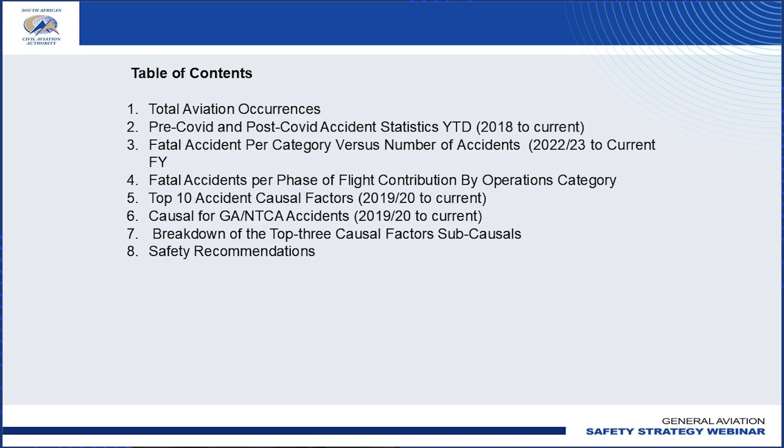For the current year, we've just looked at the first quarter, which is April to June. We've recorded thus far 33 accidents, 9 serious incidents, 33 airprox events, and 29 CARS events. That gives us a total of about 104 accident occurrences recorded.

Based on the current flying hours and just the estimate that we have there, we do see that it is a decrease of about 9% per 10,000 flying hours flown.

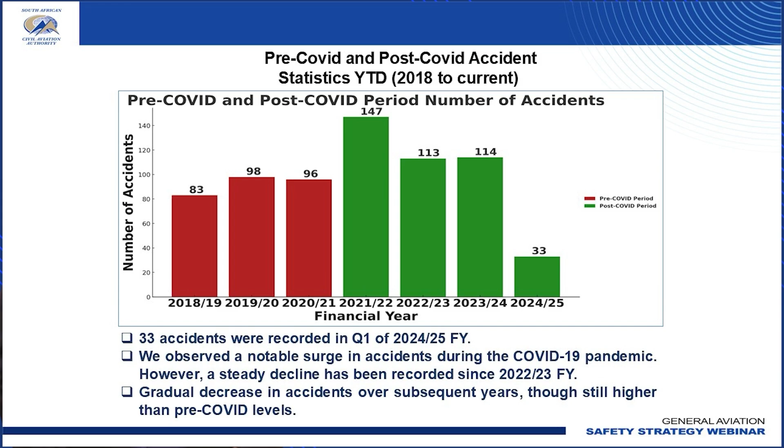In the last few financial years, those accident numbers have come down since the COVID period, but they seem to have stagnated around the 110, 115 number. If you look at where we are currently, just the first quarter number, we're most likely going to get to about the same 110 to 120 accidents recorded for this current financial year.

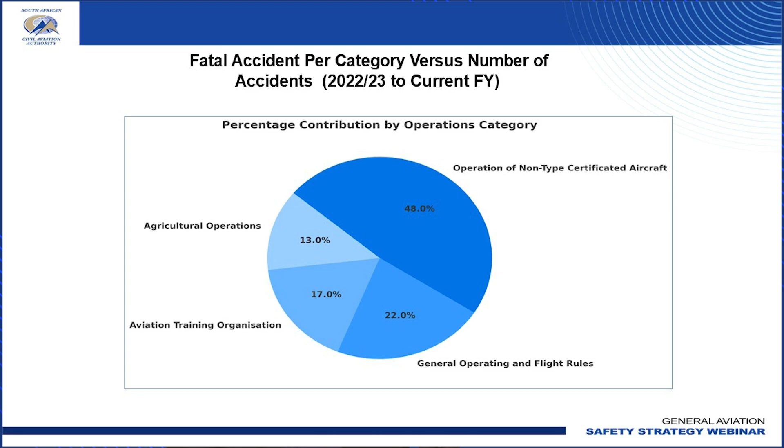Taking the fatal accidents into consideration, what we've done with this slide is break down the fatal accidents per operational category. So 48% of fatalities recorded are in the non-type certified aircraft environment, followed by 22% in the general aviation operating environment, with the balance attributed to training organizations and agricultural operations.

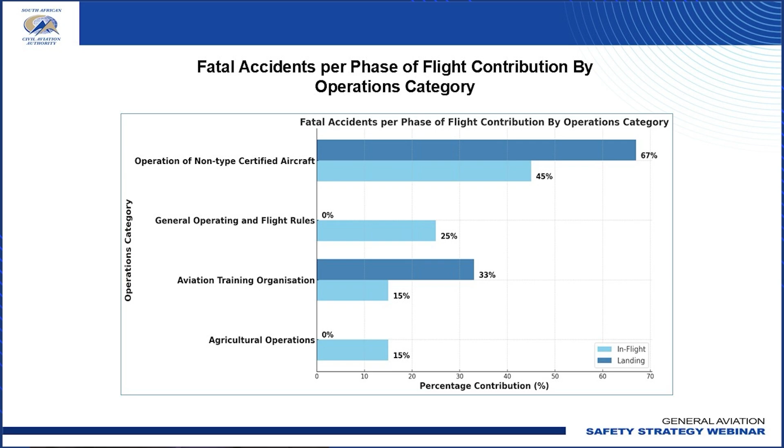When we look at training organizations, we again see a large number of fatal accidents happening in flight and during the landing phases, whereas when we just look at agricultural operations, most of those fatal accidents actually are in flight.

Moving on to what causes these aircraft accidents, we've looked at the top 10 causal factors recorded over the past 4 financial years at AIID. One thing that shines out by sheer number is the pilot and flight crew contribution to the causal factors, followed by mechanical engine and power plant, with the third being collision and structural damage.

What we're going to do is break down these causal factors in the next set of slides. When we look at the causal factors broken down per financial year, what we want is to get a picture of the trend in those top 10 causal factors.

When we look at engine and power plants, we see a decreasing trend, going from the 2021-22 cycle of 29 down to 26 the following year, with 14 of those causal factors in the last financial year attributed to mechanical failures.

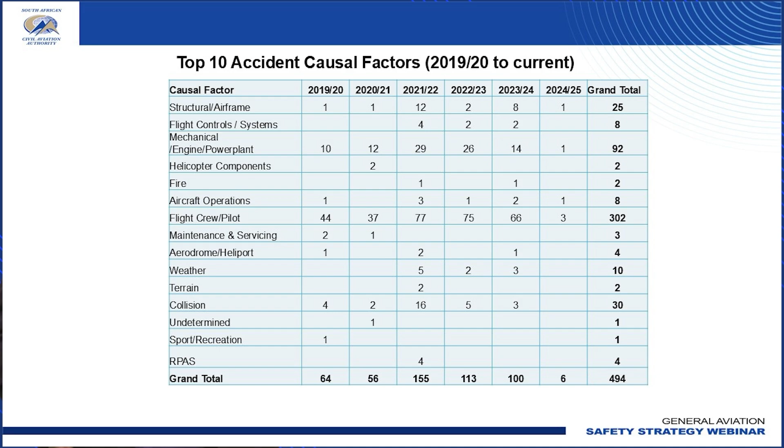So this slide just represents a breakdown of where we see the causal factors. What we will do is unpack this in the following slides.

Unpacking these causal factors, specifically for aircraft operating in the general aviation sphere, over the past 5 years the theme seems to be recurring: the flight crew contribution is still one of the highest throughout the years, most obviously recorded in the 21-22 period, where we've recorded 147 aircraft accidents.

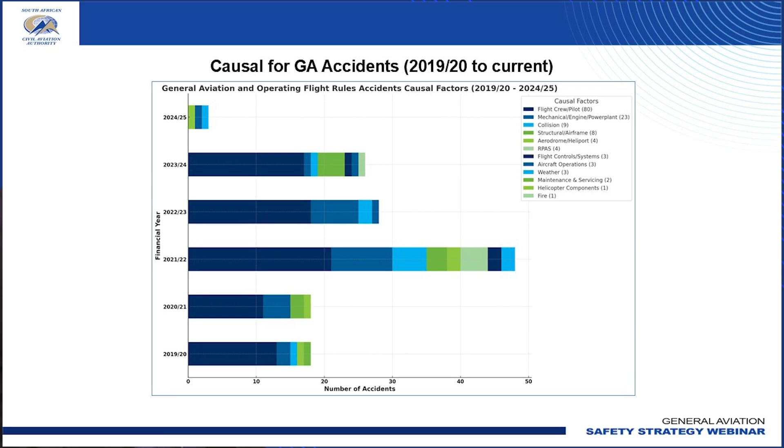So when we talk about the causal factors of flight crew and pilots, what are we talking about? What is it that they contribute in terms of accident causation? You'll see here that 21% is loss of directional control on the ground during takeoff or landing phase, with majority on the landing phase. The other attributions are poor airmanship technique, unstable approaches, and heavy or hard landing.

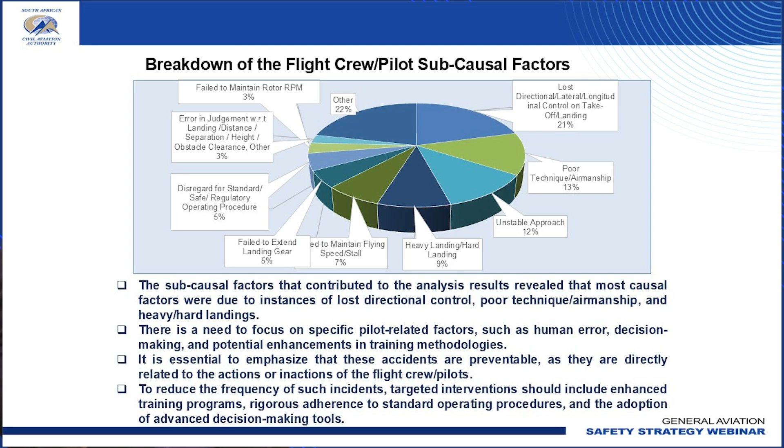So again, when we look at accident causation and take the subgroup of flight crew and pilots, what you see here is that the landing phase of flight is again where most accidents occur, and what leads to these accidents is known as airmanship and aircraft handling.

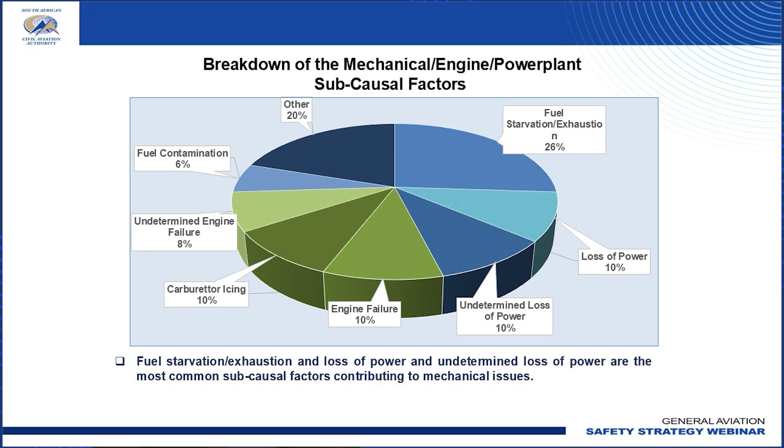Importantly, the takeaway from this slide is that fuel starvation or fuel exhaustion events could be considered avoidable accidents. If managed properly by the flight crew and maintenance crew, these could be totally avoided, which would also lower the number of accidents we see in the general aviation sphere.

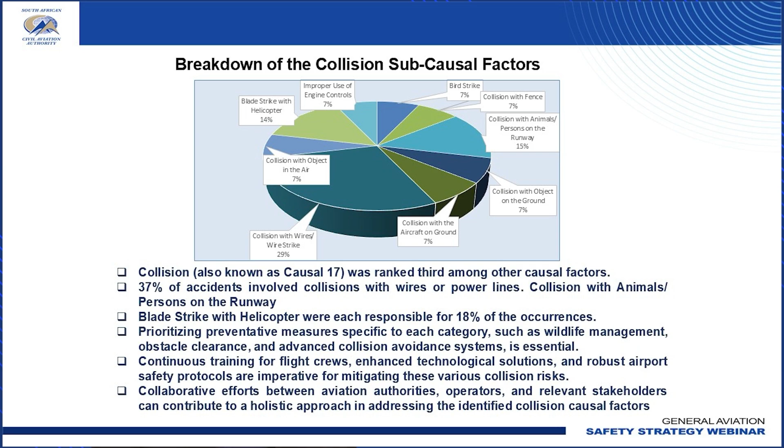This is most likely recorded from the agricultural operations, and this is also due to the nature of the functions performed in terms of agricultural operations. Again, a collaborative effort needs to be made in order to scan and identify these hazards that exist, where we can then lower the number of accidents with regards to collisions.

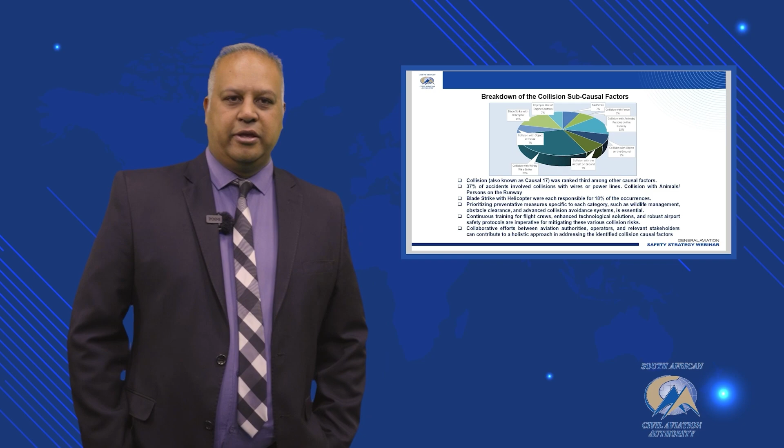We did also record 2 mid-air collisions in the past 3 financial years, and again, these are, I think, avoidable accidents. So what is it we do at AIID that helps reduce these accidents and prevent reoccurrence? Well, the mechanism we use is to make safety recommendations in our final reports and through our investigation process. This is achieved by sending safety recommendations to specific organizations in order for them to implement these recommendations to improve aviation safety.

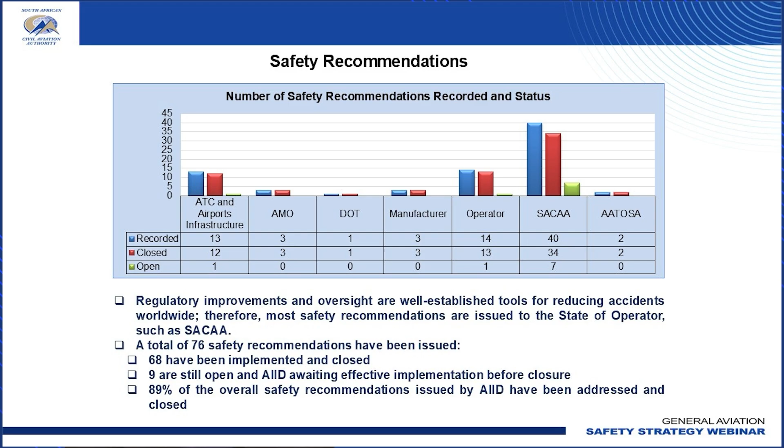What we've seen is that over the last 3 or 4 financial years, we've issued a total of 76 safety recommendations, most of which go to the Civil Aviation Authority, some to the manufacturer, and others to the ATC or ATOs and airports. This is simply because these organizations, being tasked with oversight functions, have the ability to influence the outcomes of accidents in the future.

A key takeaway from this slide is that 89% of the safety recommendations issued by AIID overall are addressed and closed with effective implementation. And that is a good way for us to monitor these accidents. But as said in the previous slides, most of these accidents, I believe, could be avoided and are avoidable accidents, and it comes with just a little bit of practice.

Welcome back, and thank you, Mr. Soomesh Maharaj. So, to all the audience present tonight, you can clearly see the stats speak for themselves. These are real-world stats, stats within South Africa, South African aircraft, and these are stats of fatalities, of injuries, of aircraft damage, and of many incidents.

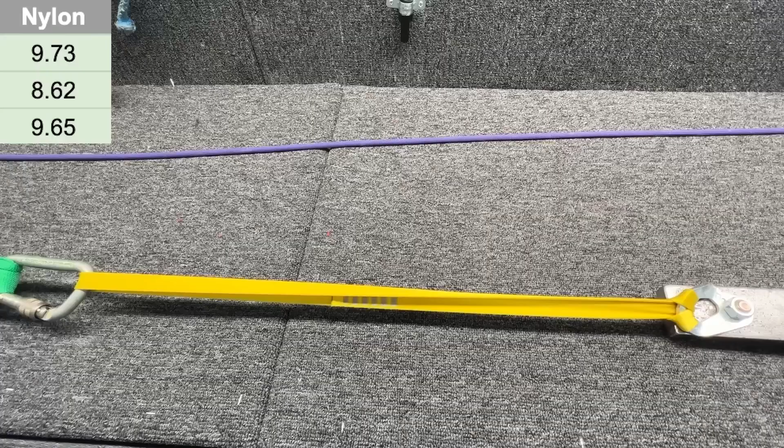No way, it's over 20! We're going to test a lot of girth hitches today, with Dyneema slings, nylon, and on hangers and round stock like a climbing ring or carabiner. We're also going to test girth hitched master points. John Godino from Alpine Savvy says one of the most popular concerns people have about girth hitching is that it dangerously weakens the material to some catastrophic level. He thinks generally it doesn't, since you're starting with something very strong. Let's hit it and see. Starting with slings directly on a hanger... look what it does to the hanger. Consistently not good - you can see damage there, creased. This one's messed up in a few places, comparable damage. Some just popped in one spot, but the numbers were very consistent on the Dyneema and pretty consistent on the nylon too. Next, checking a girth hitch with Dyneema sling on a rounded surface - a totally round bar stock carabiner, not I-beam style, which should give more strength due to less sharp bend radius. 17.62 - there you go, a little deformed there, looks really damaged right where it broke. No way, it's over 20!

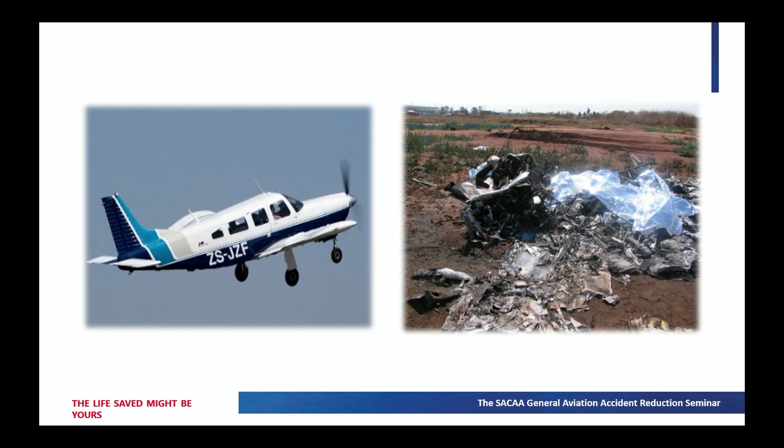This leads to what I'm going to be telling you today - a new perspective maybe on density altitude, high density altitude, and overloading. In a nutshell, these six points are what I'll be discussing with you.

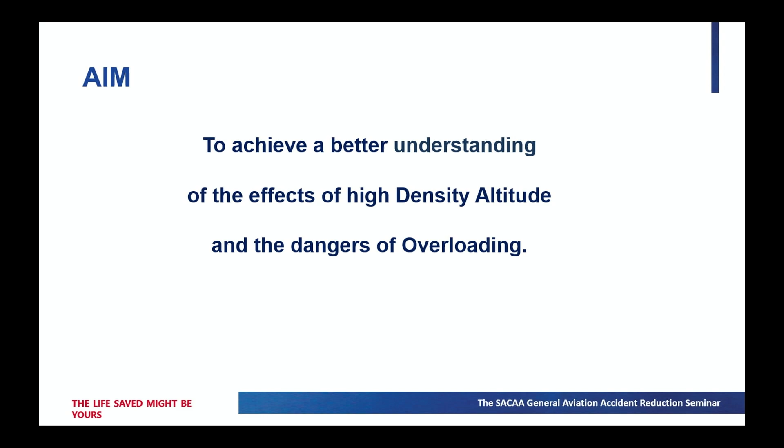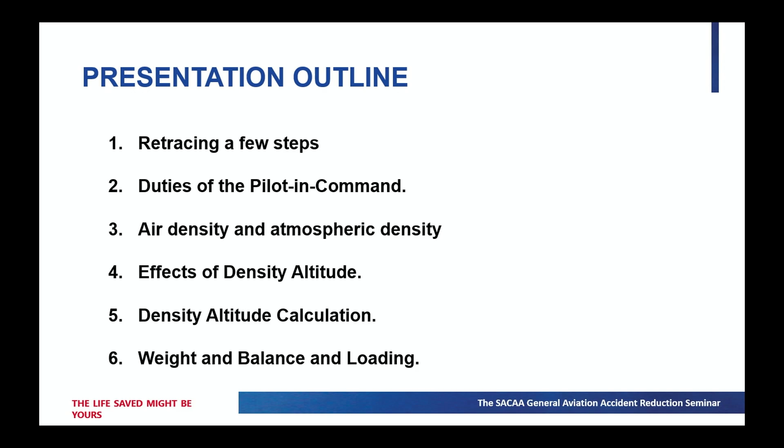There's a 7th one which I'll be closing with. First, we're going to look at a bizarre topic you might not have thought about: what are the duties of the pilot in command of a flight? Then a few thoughts on air density and atmospheric density, effects of density altitude, a simple density altitude calculation, and some factors relating to weight and balance and loading.

Think back about the example of climbing equipment that's certified. It's made by someone according to certain standards, and it's supposed to do that job, and you can have surety that it can do that job. Aircraft are designed exactly the same way. Someone applies for a type certificate for that aircraft, the design is approved, the aircraft is built to be able to do that. The type certificate becomes a kind of contract between the approving authority and the manufacturer.

So that's aircraft design. Now, Part 21 of the Civil Aviation Regulations deals with certification. We'll look at a few slides related to that. We're going to look at Title 14 of the American Regulations, talk about performance and controllability, and some POH limitations.

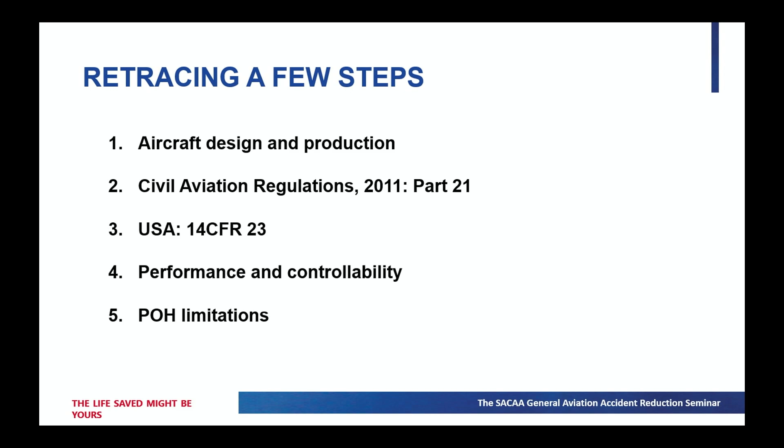First, Part 21, Civil Aviation Regulations, that's the certification part. You might not have looked at that yet, that's all right. Now, what you see in front of you is Technical Standard 21.02.3, Airworthiness Design Standards. And what you see there is this absolute hidden gem in the regulations, which says for a type certificate which national regulations need to be complied with. If you go down to 1.3, you'll see aeroplanes, normal, utility, acrobatic, commuter categories.

We, the South African CAA, require compliance with the CFR 23. Now, a word on the American regulations and how they're structured. They look a little bit different from what we do. The old FARs, Federal Aviation Regulations, the titles have changed. They are now the Code of Federal Regulations. Title 14 deals with aeronautics and space. Chapter 1, Subchapter C, deals with aircraft.

And that brings us to 14 CFR 23. Now, this sounds like total Latin. Folks, that is basically what it looks like. Part 23 deals with airworthiness standards, normal category aeroplanes. Zooming in a little closer, that's what it looks like. And you might still be trying to figure out what this is about. The Piper Lance, and quite possibly the aircraft you fly, are certified according to these standards.

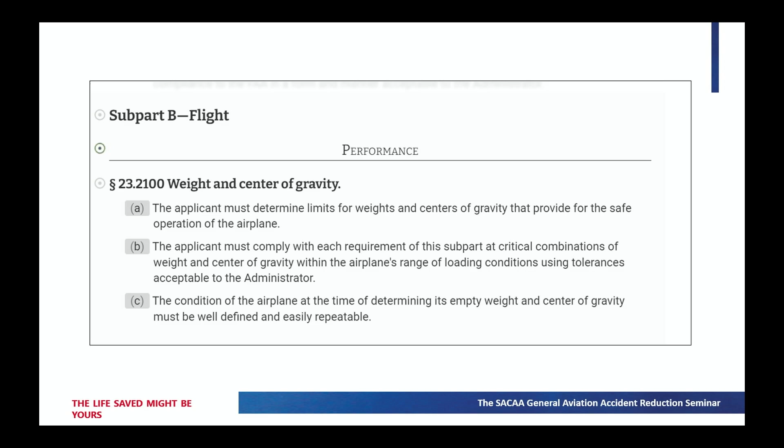That's not the point. What is the point? Well, this is how this aircraft is built, designed, approved. Weight and center of gravity, for example, you'll see this falls under the performance section. I'd like to focus your attention on paragraph A there: the applicant must determine limits for weights and centers of gravity that provide for the safe operation of the airplane. What that means is the certification limits determine what is safe for this aircraft to do. Outside of that is not guaranteed safe, and you would have to be pretty sure of yourself to go beyond what the manufacturer thought was safe.

The second aspect, very interesting, controllability. Once again, paragraph A, the airplane must be controllable and maneuverable without requiring exceptional piloting skill, alertness or strength within the operating envelope. And A1 says, at all loading conditions for which certification is requested. Outside of the certification scope, there is no guaranteed safety, no safety margin, and in fact it's a reasonable assumption that outside of those limits, the aircraft might be inherently unsafe to fly.

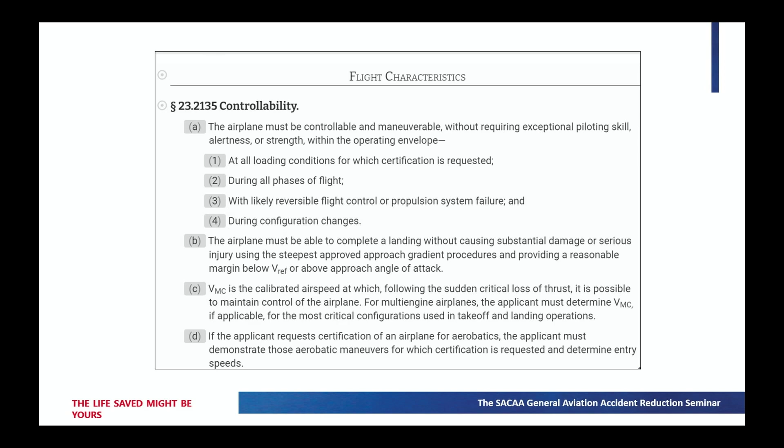Interesting, subpart C, structures. Once again, in this case, I'll show you an example of a type certificate. The manufacturer, who is the applicant, must determine the structural design envelope, which describes the range and limits of airplane design and operational parameters for which the applicant will show compliance with the requirements of the subpart. What that means, folks, is that inside of that safety framework, the aircraft is safe to fly, and you'll see where we're getting with that.

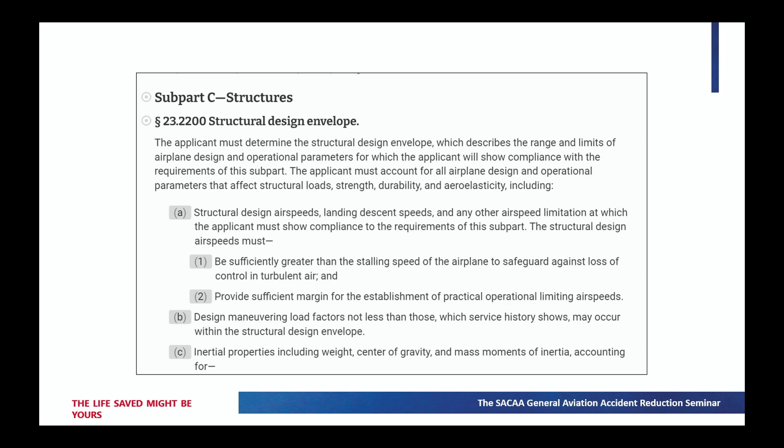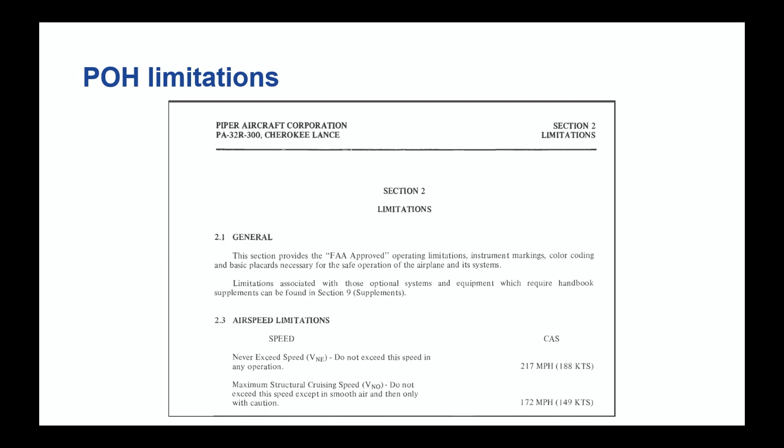Those restrictions and limitations are put into the POH, and this is the Piper Lance example I showed you earlier, the aircraft that had an accident. Section 2 of every POH manufactured in the US contains the limitations. I'd like to show you the center of gravity limits are there, maneuver limits are there, and so forth.

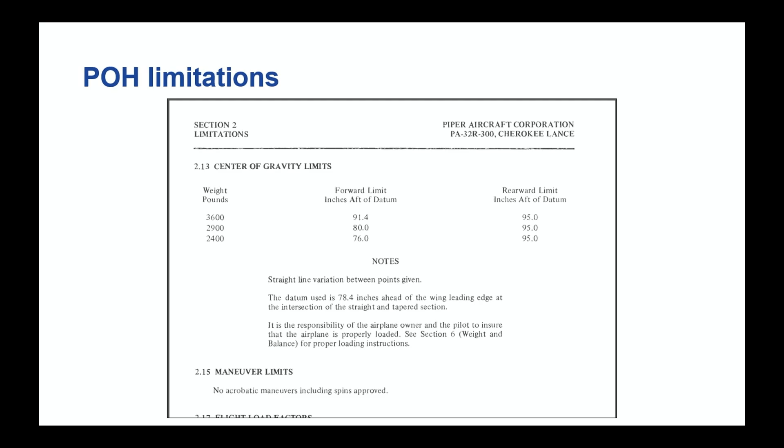Now why is this important? Let's have a look at that. Regulation 91.02.7: what are the duties of the pilot in command regarding flight preparation? The PIC may not commence a flight unless he or she is satisfied that the mass of the aircraft does not exceed the maximum certificated mass, and that the center of gravity is within limits in the AFM.

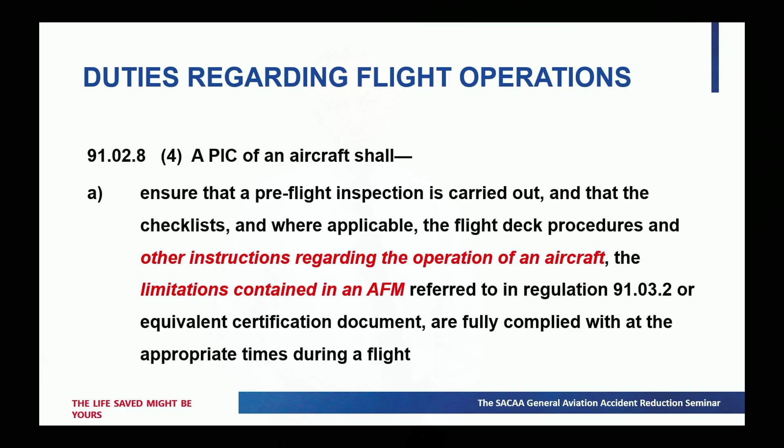So you do need to be acutely familiar with the requirements and limitations in the POH. And it doesn't stop with flight preparation. Flight operations, 91.02.8 - I'm not going to read it all to you, but it's the duty of the pilot in command to operate the aircraft according to the instructions and limitations. Now that's a mouthful of legalese, I'll move on. That's a little bit of background, but the idea was to paint a picture of exactly how this flying machine is actually built, what it's capable of doing, and why you have to operate it within those approved limitations.

Right, so keep in mind we're talking about density altitude and aircraft operation loading. So very simple question: what is density? Well, good question, simple answer depending on where you're looking at.

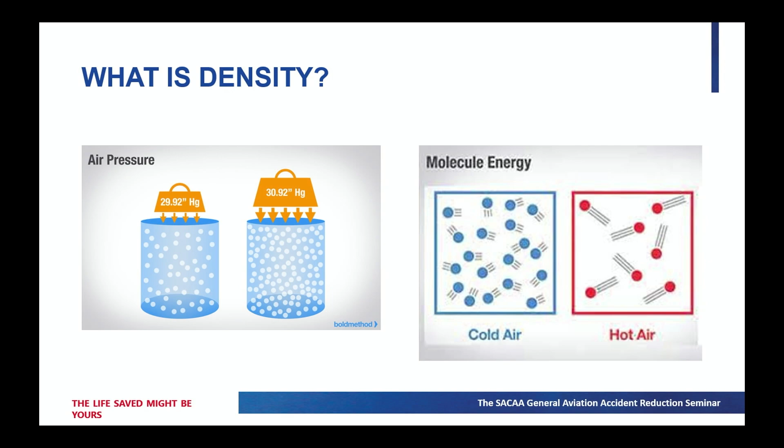So what would the effect of air density be? Well, pretty much it affects the performance of the whole aircraft - the wings, the control surfaces, the engine, how much oxygen is ingested into the engine. And there's a very intuitive way of calculating that or getting a feel for what's going on, and that's really what density altitude is about.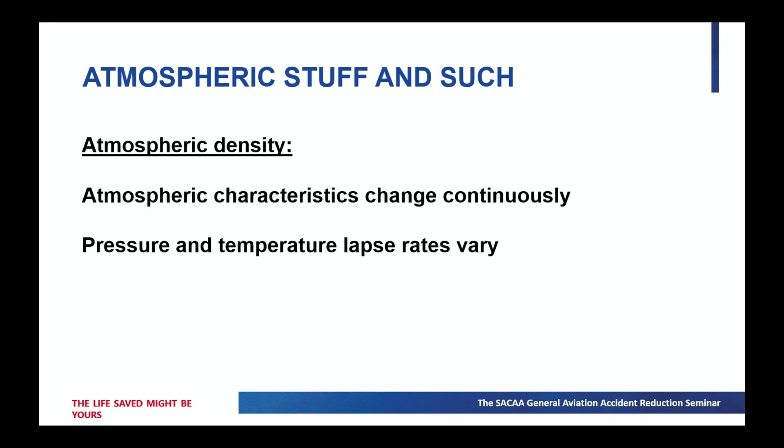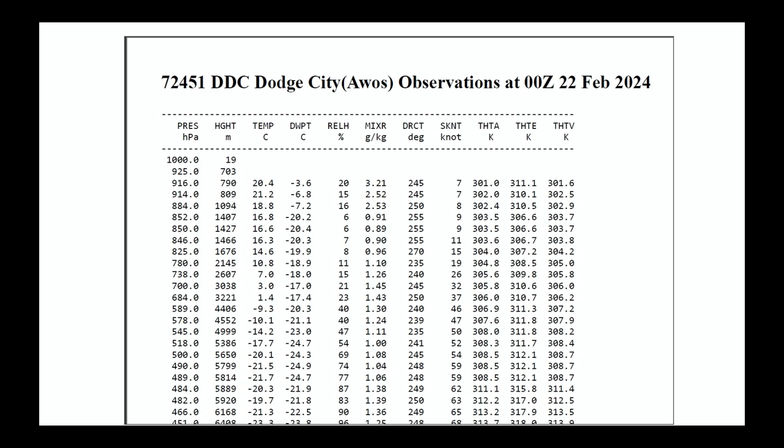So 2 images, both from Dodge City. The first one just shows some data from balloon soundings. The point here is that these things are a lot more messy than we often make them out to be. The pressure lapse rate is in the left-hand column, there's height, and you can see the temperature - there's actually a temperature increase, 20.4 degrees, 21.2, a big drop to 18.8, and at some point there's an isothermal layer. So the atmosphere doesn't always behave the way we want it to, or that our manual says it should.

And a little bit more dramatically, this is also Dodge City. These are actual upper air measurements at Dodge City, 2012. The blue line shows the lapse rates, the temperature lapse rates with height in the Northern Hemisphere winter.

The red one is in summer. You can see how much those lapse rates differ from the theoretical model. On the red line, you can even see there's an inversion at very low altitude. So these things don't always work out the way we want them to.

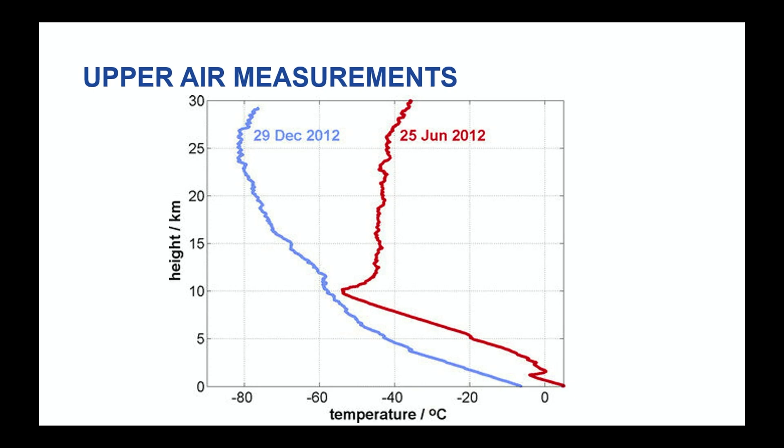For simplicity's sake, what we have to do as pilots is use some very simple calculations, some rules of thumb. There's a temperature decrease with altitude of 2 degrees Celsius per 1,000 feet, and a pressure decrease of 1 hectopascal for every 30 feet. The effect on density altitude is that for every degree Celsius the atmosphere is warmer or colder than ISA, there's a 120 feet difference.

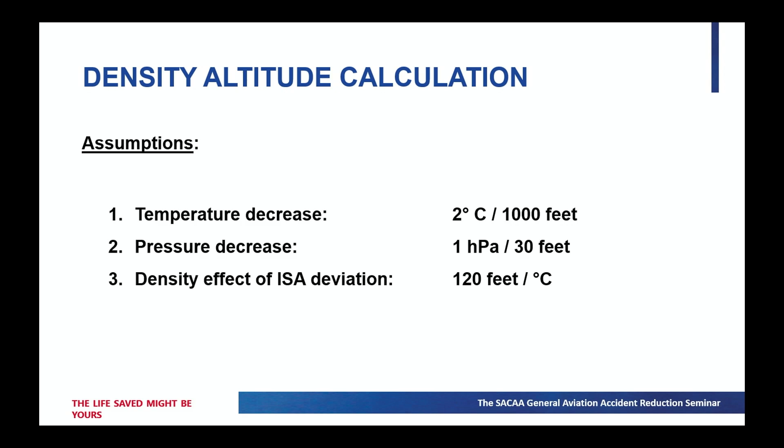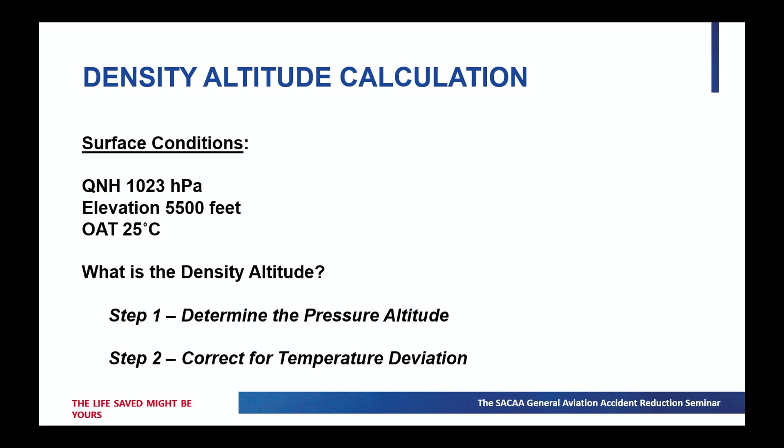How would that work in calculation? Very simple. Assuming that surface conditions are as you see in front of you, 1023 hectopascal, 5,500 elevation, and outside air temperature... well let's have a look at how to determine the pressure altitude and how to correct for temperature deviation. I just have to make a correction. What you see in front of you does not match exactly.

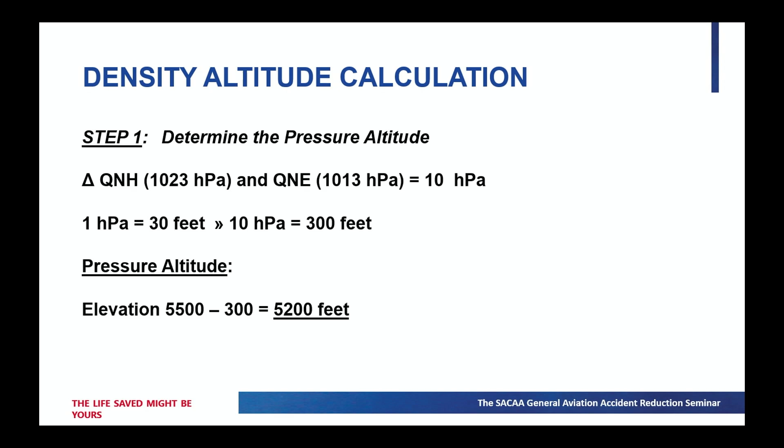First, let's check the pressure altitude. We determine that by subtracting standard pressure from the actual QNH. In this case, that's a 10 hectopascal difference. At 30 feet per hectopascal, 10 hectopascals gives us 300 feet. In other words, the pressure altitude is less than the elevation of 5,500, which sounds good.

Except let's look at the temperature effect. If we assume the temperature lapse rate is 2 degrees Celsius per 1,000 feet, that's 10 degrees Celsius over 5,200 feet, bringing us to a conclusion that ISA should be 5 degrees Celsius. Is it ISA? No. So there's a 13 degrees Celsius difference from ISA, giving us approximately 1,600 feet extra, which for this Piper Lance aircraft brings us to a density altitude of almost 6,800 feet. Folks, that is very significant.

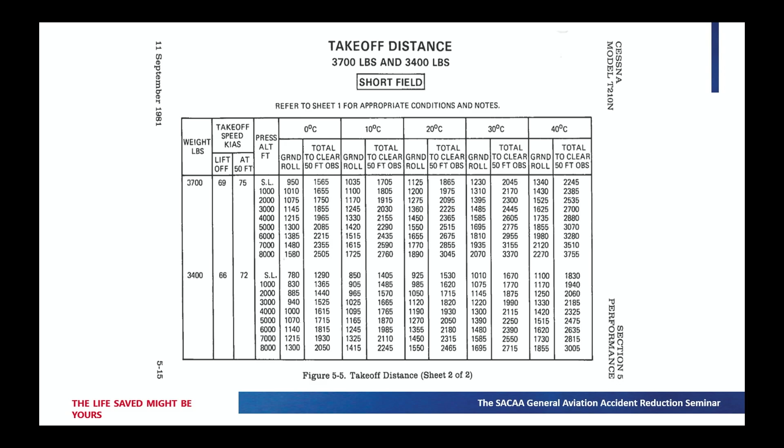You might ask, well what's the POH for? The POH actually has that in, just calls it differently. If you do your takeoff calculations, your performance calculations for takeoff and climb, you should be fine. This is an example from the Cessna T210, and it's interesting how with increasing temperature and increasing aircraft mass, how dramatically these things change. A big factor, of course, is how these things come together.

Having looked at that graph, what's the effect of temperature on indicated airspeed and TAS? As a reminder, indicated airspeed is not a speed, it's merely a pressure. True airspeed is the speed the aircraft is actually flying at, and that is important. There's a very big distinction. One could have a very low indicated airspeed and a very high true airspeed, and that could lead to runway overruns, takeoff issues, and so forth, as you can see in that right-hand picture.

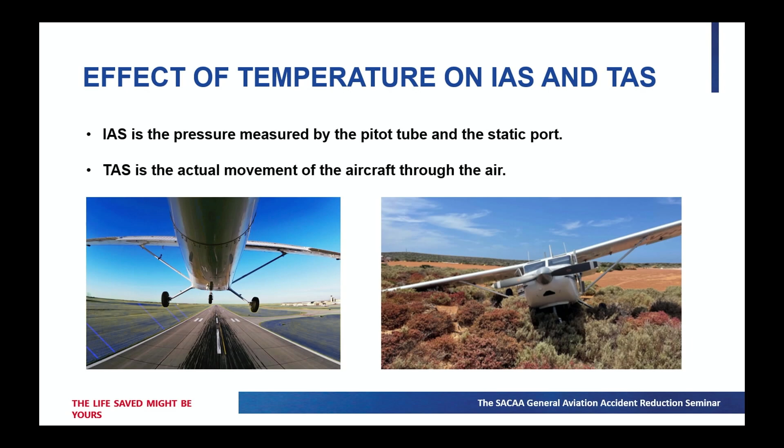Now, you remember that popular pilot saying: if the doors can close, the aircraft will fly. Oh yes, have a look at that. There's a limit to what these things can do. I hope that is starting to become clear. So there's a weight and performance issue.

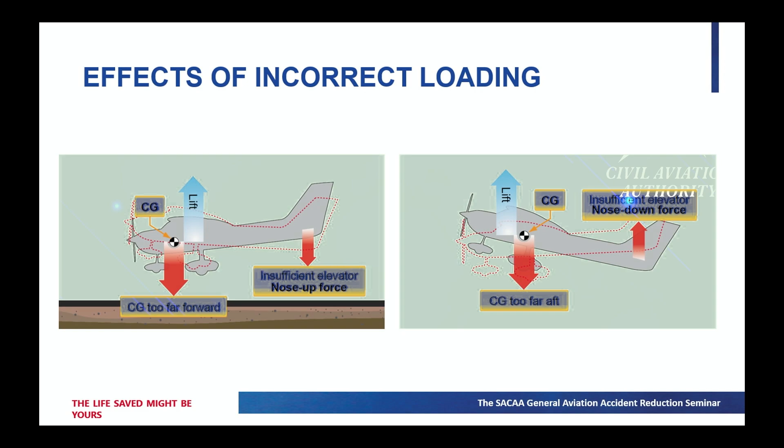There's another issue, and that's controllability, as you might remember from the FAA. Folks, controllability refers to whether the aircraft is actually controllable by the pilot, and that is a very important design parameter. Center of gravity too far forward, too far back - the point is not which is better, the point is it should be correct.

Now, you can ask us, what's the point of all this stuff, folks? Where are we going? There's a long spiel, a long speech. And thinking about this whole presentation, how does it tie together? There's so much that we as pilots know, and yet these things continue, they still go on.

What you'll see in the corner of your screen is threat and error management, with a graph detailing its elements. Errors are unavoidable, but we try to avoid them. Threats are part of what we do and have to be managed. If an error happens, let's manage it. If it's not managed well, it leads to an undesired aircraft state - that's the back-against-the-wall aspect that needs to be looked at.

So there are five kinds of errors that ICAO identifies in its Human Factors Manual. They're pretty much intuitive and understandable once we're familiar with them, but they are the number one concern.

What you can see there is simply: I knew what to do, I just decided not to do it - I deliberately committed an infringement. A procedural error refers to situations where a pilot knows what to do, tries to do it, but makes a mistake.

A communication error is simply what it is. And for those of you familiar with language proficiency and radio comms, that's a major in-flight risk.

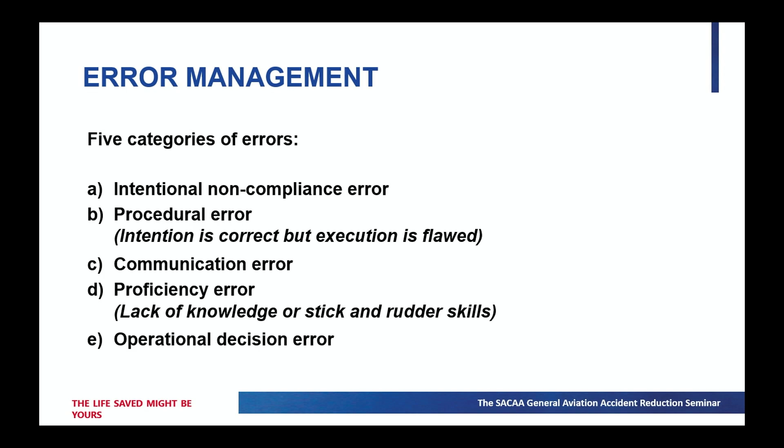Proficiency errors are errors where a pilot simply lacks the skills - there's a deficient lack of knowledge, skills, and maybe poor attitudes. Lastly, operational decision errors are simply errors made in the heat of the moment. Now, very simply, looking at the Piper Lance, there are a couple of factors - and once again, no finger pointing.

High density altitude was a factor there, folks - high density, overloading, and low performance. Aerodynamically, high density altitude affects everything: engines, airframes, controls, propellers, control surfaces. The overloading aspect has a structural issue, a performance issue, and a controllability issue.

Now, which leads me to the main point of this discussion: threats can be overt or latent. In other words, threats can be visible, recognizable, you can be aware of them, or they can be hidden in the system. Why do pilots, with open eyes, make decisions to fly, to do things that they should not be doing? That really is the million-dollar question.

Safety campaigns, awareness, exams, training and so forth - I thought that for this presentation, the most fascinating aspect, the best way of saying it, is what ICAO says. The quote you see in front of you is from the Human Factors Manual, the Threat and Error Management section, which basically says - and I thought as a pilot myself, that makes sense.

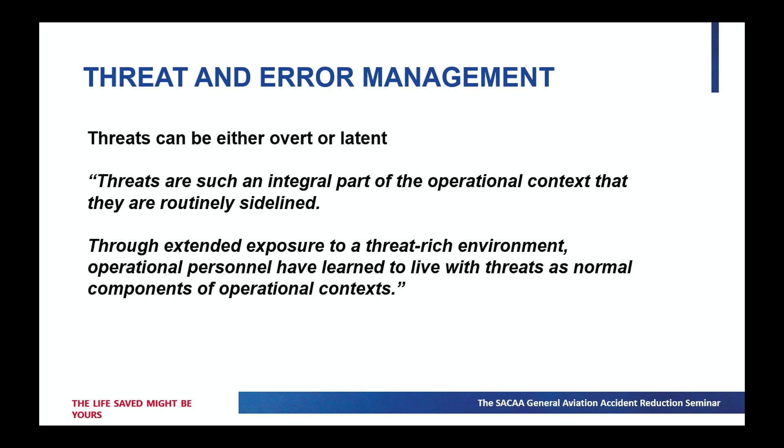Whether you absorb everything that's in here or not is not the point. If it triggers some thinking, if it impels or motivates you to think slightly differently, anticipate some threats, think about what could go wrong, what could I do here, is there anything I'm not aware of - folks, if that's all you take from this, it's a success.

Now, I would like to end off with this fantastic quote - possibly my personal favorite aviation quote, from Frank Borman, one of the most senior commanders in the American space program, in the Gemini series and the early Apollo series: the superior pilot uses superior judgment to avoid those situations which require the use of superior skill. That's it from my side.

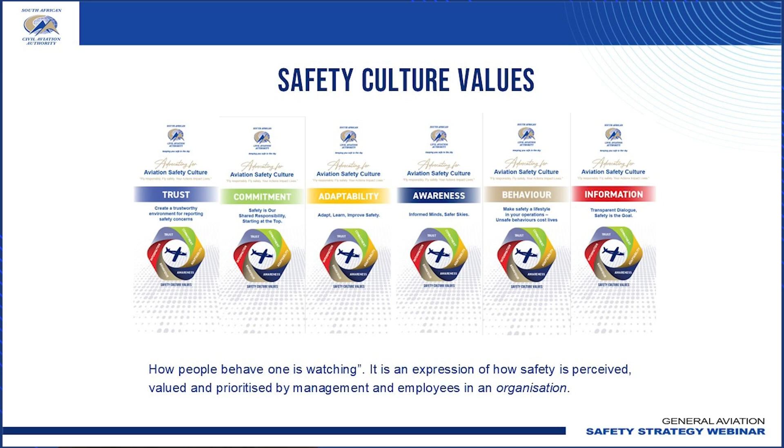In the next presentation, I'll go through each of the safety culture values to see what each value means, what the key enablers are, and what the key disablers are for each culture value. And just to remind you again, as an individual, please ponder how you can live each of these safety culture values.

Secondly, we want to see those in management or leadership actually providing the resources needed for technical staff to perform their duties. They also have to ensure there are appropriate governance structures in terms of the processes and procedures required to support a positive safety culture.

Remember, I've mentioned previously that as much as you can say you have a positive safety culture, if you don't have the right processes and procedures to manage it, that's not going to work. Therefore, it is the responsibility of management to provide those governance structures in terms of the processes and procedures to manage a safety culture.

What are the disablers when it comes to showing commitment? We want an environment whereby management does not put profit before safety. There has to be a balance. Organizations exist to make profit, but we want to do so in a safe way. So we don't want instances where management wants to proceed with operations at all costs, regardless of what the safety status is.

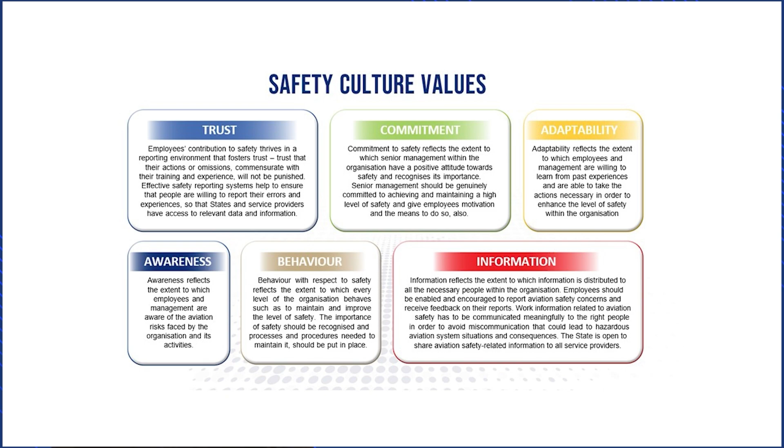I know in my presentation I may have referred a lot to the commercial or formalized environment, but as an individual, just ask yourself, how am I living the safety culture values? Because the 3 ingredients when it comes to the safety culture value are the policies, the processes, the procedures, but we also have the people, the individuals when it comes to behavior, actions, and attitudes. So if we bring it all together, we are all impacted.

Safety culture cannot live in a vacuum. We are the ones living the safety culture values. So ask yourself, how am I living the safety culture value? What are the decisions that I'm making that are keeping me safe, and also my fellow aviators, in terms of promoting aviation safety in all contexts, be it general aviation or commercial environment? I think we can all take specific actions in entrenching or living the safety culture values.

So in conclusion, what are we saying? We're saying let's be safety conscious, all of us. Let's adopt the right behaviors to be safe, the right behaviors to promote aviation safety. Let's create an environment that fosters a positive safety culture, that fosters a just culture. Let's promote the safety culture values, not only amongst ourselves, but let's get the conversations and engagements going. Let's discuss with our fellow colleagues, our fellow aviators, how we can internalize and live the safety culture values.

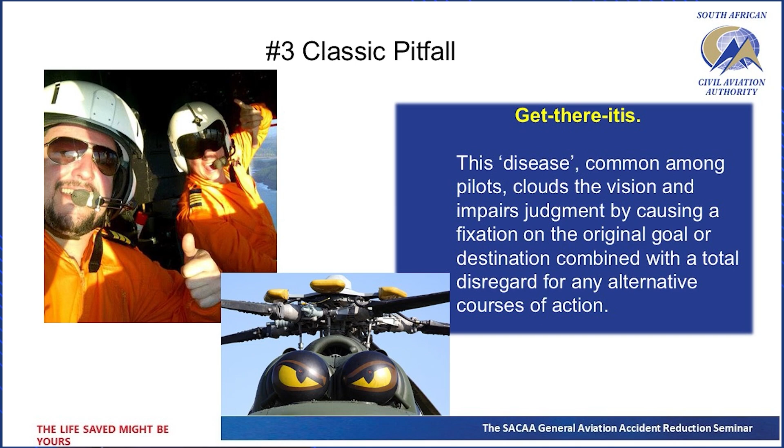Classic pitfall number 3 is get-there-itis. This is a disease common among pilots. It clouds the vision and impairs judgment by causing a fixation on the original goal or destination, combined with a total disregard to any alternative course of action.

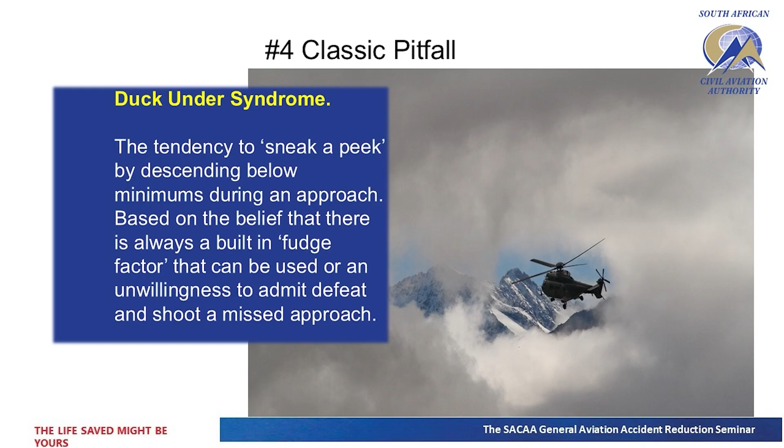Classic pitfall number 4, this is duck-under syndrome. This is a tendency for pilots to try and have a sneak peek by descending below the minimum during an approach, based on the belief that there's always a built-in fudge factor that may be used, or an unwillingness to admit defeat and shoot a missed approach.

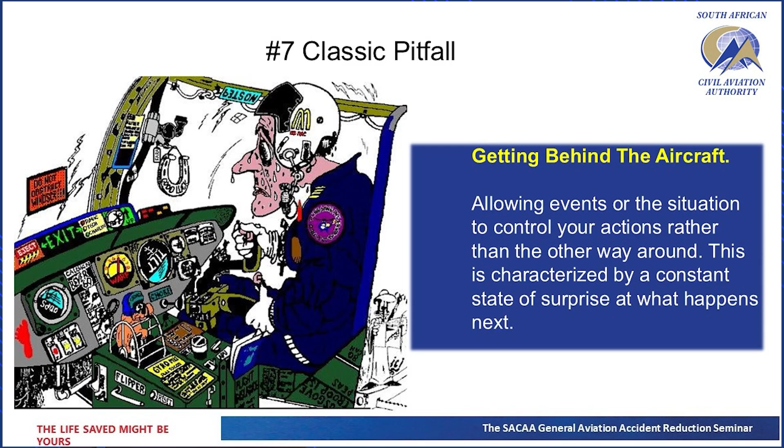Classic pitfall number 7, this is getting behind your aircraft. Allowing events or the situation to control your actions rather than the other way around. This is characterized by a constant state of surprise at what happens next.

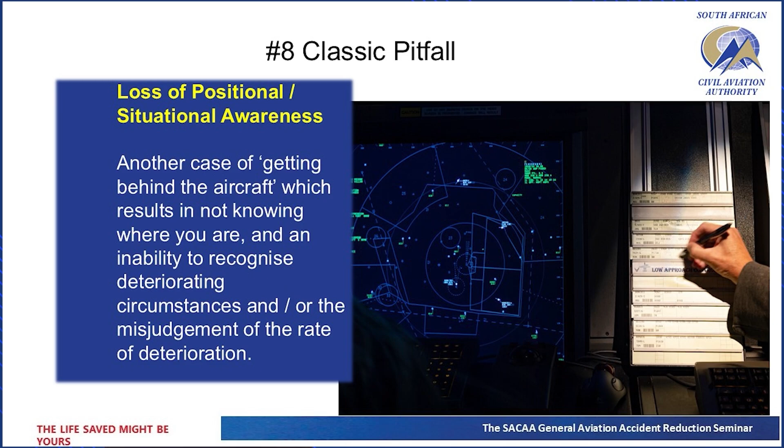Classic pitfall number 8, and this is loss of positional and situational awareness. Another case of getting behind the aircraft, this results in not knowing where you are and the inability to recognize a deteriorating circumstance and or the misjudgment of the rate of deterioration.

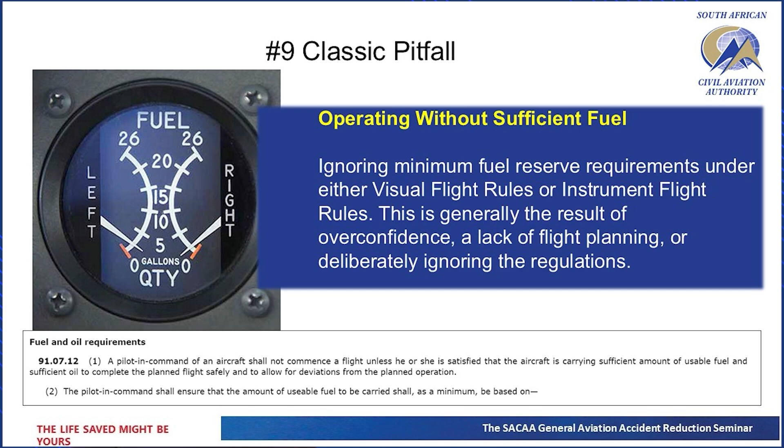Classic pitfall number 9, this is operating without sufficient fuel. Ignoring the minimum fuel reserve requirements under either the visual flight rules or the instrument flight rules is generally the result of overconfidence and lack of flight planning, or deliberately ignoring the regulations.

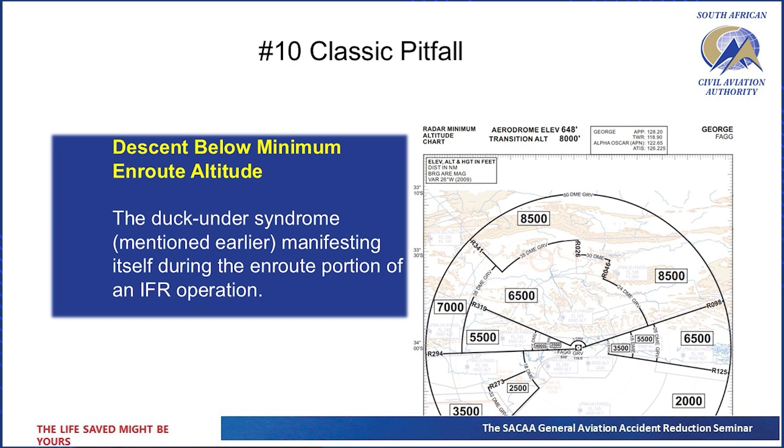Classic pitfall number 10, descent below minimum en route altitude. This is what we could call a duck under syndrome, as mentioned earlier, manifesting itself during the en route period of the IFR operation.

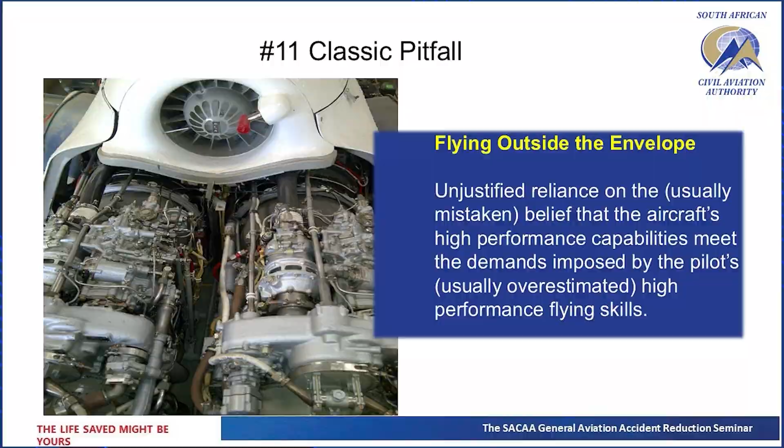Classic pitfall 11, flying outside the envelope. This is unjustified reliance on the usually mistaken belief that the aircraft's high performance capabilities meet the demands imposed by the pilot's usually overestimated high performance flying skills.

Okay, let's move on to our scenario. The accident scenario can be found on the SACAA website, and the accident report name is CA 18-2-3-8017.

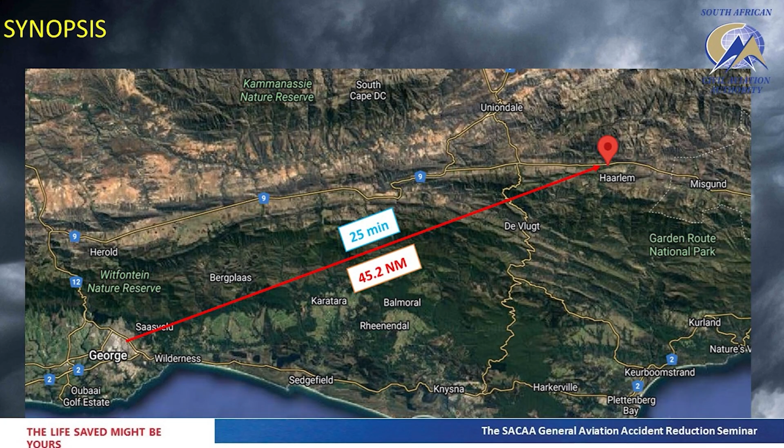So on the 2nd of October at 16:15, a helicopter was dispatched from George with a pilot and 2 paramedics on board to attend to a serious road accident near Haarlem in the Langkloof. The helicopter landed on the road, and the road accident site was approximately at 16:40.

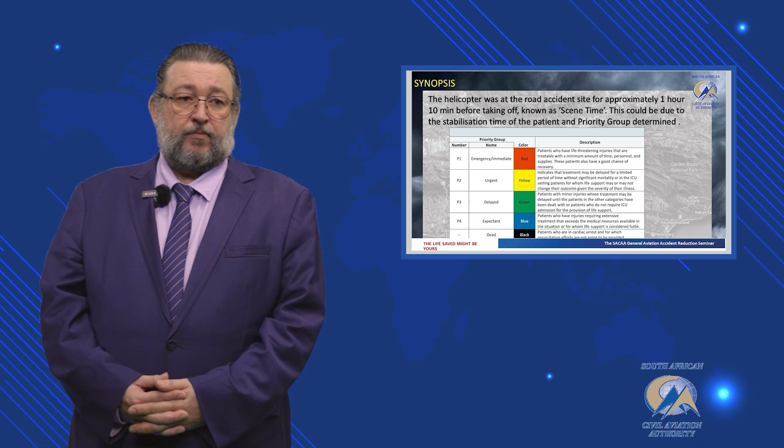The helicopter was on the road accident site for approximately 1 hour 10 minutes before taking off; this is known as scene time. This could be due to the stabilization of the patient.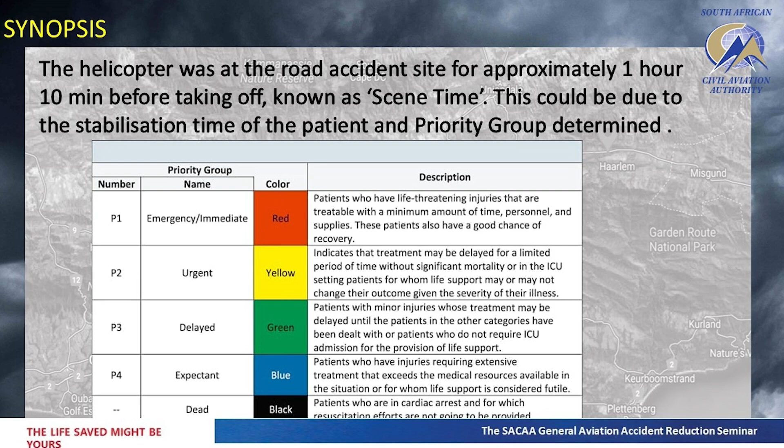In this slide, we can see that paramedics use this priority group table that will determine: is this patient fit to fly, or is an ambulance sufficient, or even worse, is the patient possibly on their last?

However, the time of liftoff from the accident site, the vehicle accident site, to collect the casualty, until the aircraft impact zone, was 40 minutes, which is rather peculiar.

So at approximately 17:50 Zulu, it took off with 1 patient who was seriously injured, for the flight back to a hospital in George. At 18:30, the helicopter crashed in the mountains and terrain near Haarlem. All the occupants perished and the helicopter was destroyed.

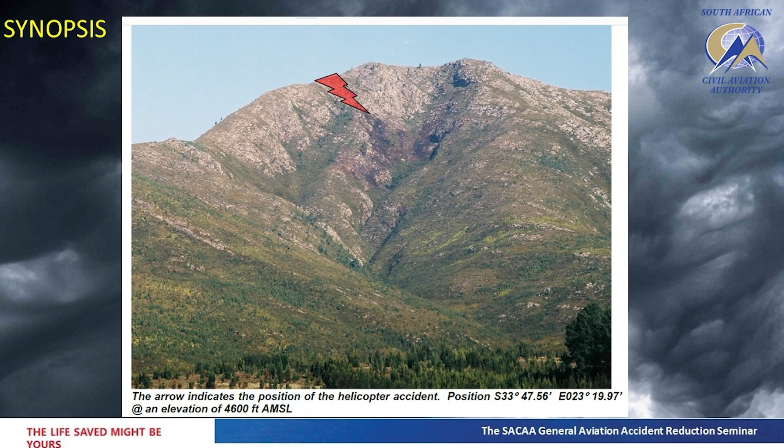As we can see in this picture, with the red arrow, we have the position of where the helicopter impacted the mountain. The crash investigators took some photographs, and you can see that the helicopter was completely destroyed, and that's a piece of the tail boom that is left over there.

Alright, so let's look into this report a little bit more closely. The name, owner of the operator was the Air Ambulance Service, or Red Cross. The manufacturer of the aircraft was Messerschmitt-Bölkow-Blohm. The model, as we can see written over there, is part of the BO105 series.

This was the S model. Nationality South African. Registration marks were Zulu Sierra Romeo Mike Romeo. The place is near Haarlem, on the 2nd of October 2005. It happened at 18:30 Zulu. Let's just take note of that time. Keep that in mind.

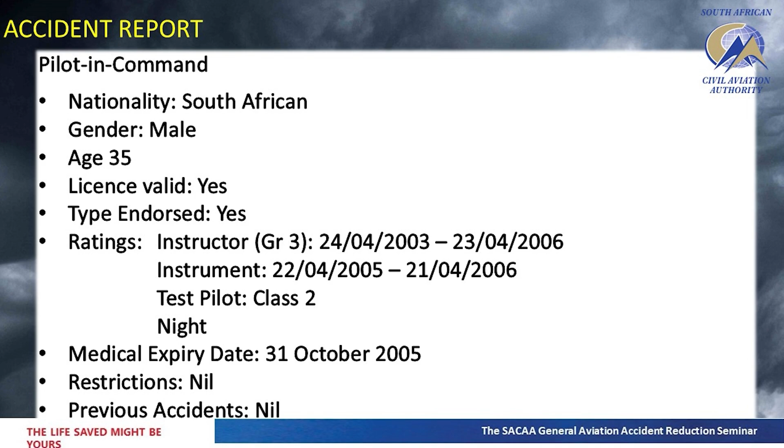The pilot in command was a South African national, male, 35 years old. He had a valid license. His endorsements for instructor, instrument, test pilot, and night ratings were valid, as you can see on the list, and his medical expiry was still valid, until the 31st of October 2005. He had no restrictions and no previous accidents.

His total flying experience was 1,779.7 hours. The total time he flew in the past 90 days, audience please notice this, was only 4.6 hours. The total on that particular type, the BO105, in the last 90 days was also only 4.6. So the total time he had on that type of aircraft was 4.6 hours, which I think is a bit low.

The meteorological conditions: wind direction was 180 degrees, speed approximately 5 knots. Visibility was unknown at that particular area of the accident. Cloud cover was unknown. Temperature was 10 degrees Celsius, dew point was 8 degrees Celsius. So we can see we don't have a very big spread between the dew point and temperature, which means there could have been rather bad visibility.

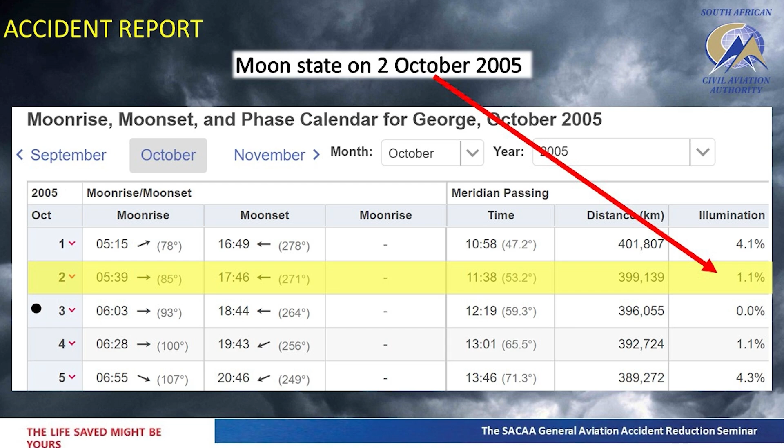The next thing I want to bring into the equation is the moon state on the 2nd of October 2005. As you can see, it was falling more into the new moon state. Its illumination was only 1.1%. So if visibility due to visible moisture or cloud was part of the factor, and you have a moon state of 1.1%, that is a very, very dark night.

Aids to navigation: the aircraft was equipped with standard navigational equipment for that aircraft type. At the time of the accident, there was no communication with air traffic control at George, and I assume that's because of line of sight and due to the valley and mountain ranges surrounding the pilot at the time. There was no transponder squawk number given or observed.

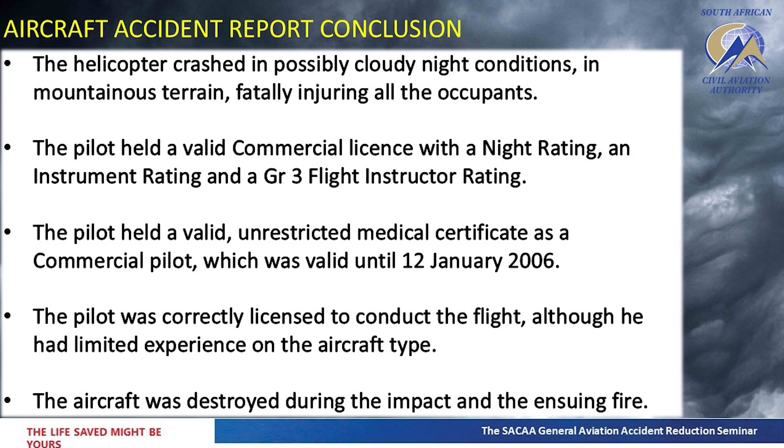The helicopter crashed in possibly cloudy night conditions in mountainous terrain, fatally injuring all the occupants. The pilot held a valid commercial license with a night rating, an instrument rating, and a grade 3 instructor's rating. He held a valid unrestricted medical, valid until the 12th of January 2006. He was correctly licensed to conduct the flight, although he had limited experience on that particular aircraft type. The result was the aircraft was destroyed during impact and the ensuing fire.

Probable causes, let's have a look. CFIT, absolutely, I would say - controlled flight into terrain. The contributing factors would be nighttime flight, spatial disorientation, and poor weather conditions.

So what we're going to do is look at the 12 classic pitfalls, and tie this together with this accident scenario of the BO105. Was it responding to peer pressure, mental expectancy, or get-there-itis? Let's have a look and see.

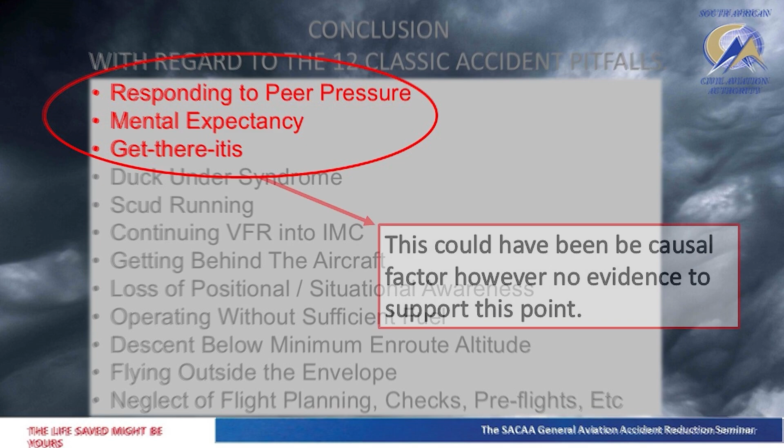This could have been a causal factor. I have no evidence to really support this. So we don't know what the culture was at the company, if he was forced - we'll never really know that at this stage.

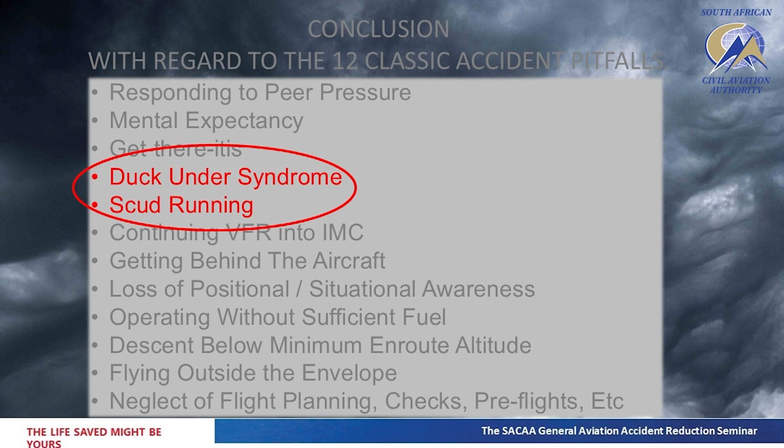Duck under syndrome and scud running - this may not have been relevant in the unfolding events of this accident based on the accident report.

Continuing VFR into IMC, getting behind the aircraft, loss of positional situational awareness - this may have been a major contributing factor, as it was a moonless night, or almost moonless, with a temperature and dew point spread of only 3 degrees Celsius, possibly resulting in the formation of cloud that could have led to a loss of situational awareness.

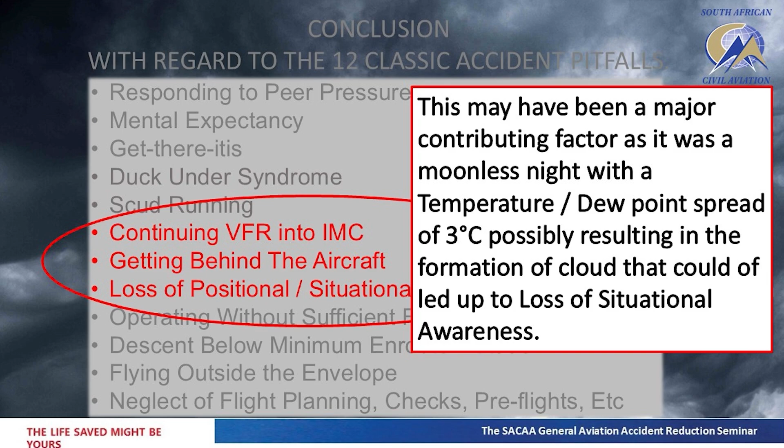Operating without sufficient fuel, descending below the minimum en route altitude - this did not seem to be a contributing factor according to the accident report.

Flying outside the aircraft envelope, neglect of flight planning checks and pre-flights - this could have been a causal factor, however no evidence is available to support this point.

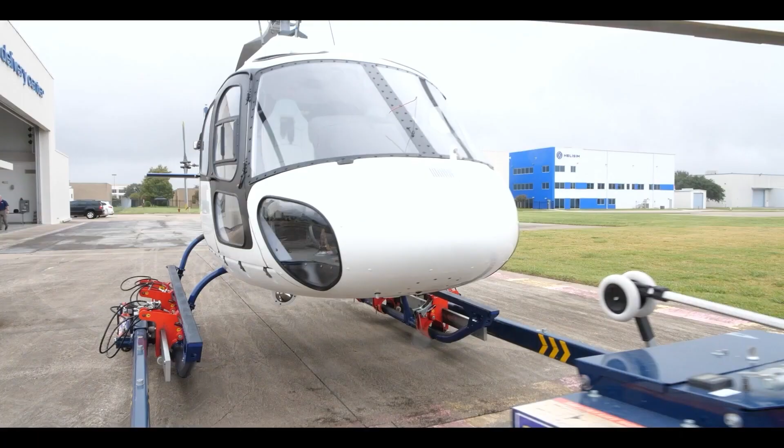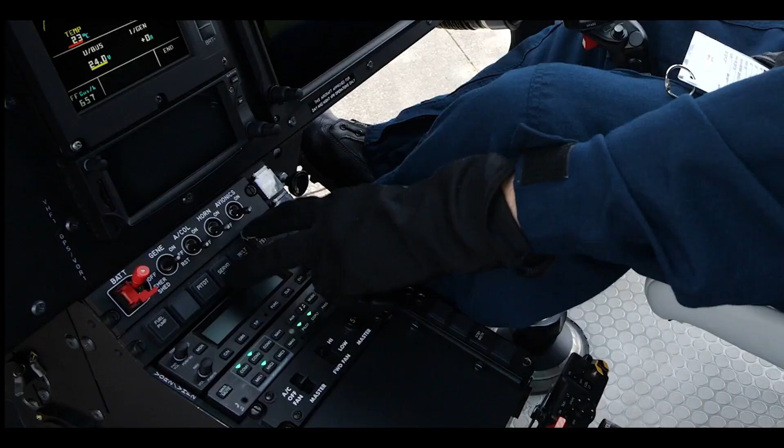You're looking at the weather and it's legal for now, but the day's forecast calls for worsening conditions that might go below limits. Your flight today is for an important new customer that needs parts delivered 50 miles away. You rush through your weather and pre-flight and realize you'll be cutting it close with the forecast. You're informed that the parts are delayed in reaching you, and the weather isn't getting any better. You hurry through your checklists, but you got this.

The weather's coming in faster than you thought, but just swing around it. If you canceled every time it looked like this, you'd never fly in this region. As visibility continues to drop, something just doesn't feel right.

You gotta stay clear of clouds in this airspace. Obstacle. Caution, what's the height of that new transmission tower around here? Okay, this is getting sporty, and those clouds are a lot thicker. Warning, you are way too low. And now, you've just punched in.

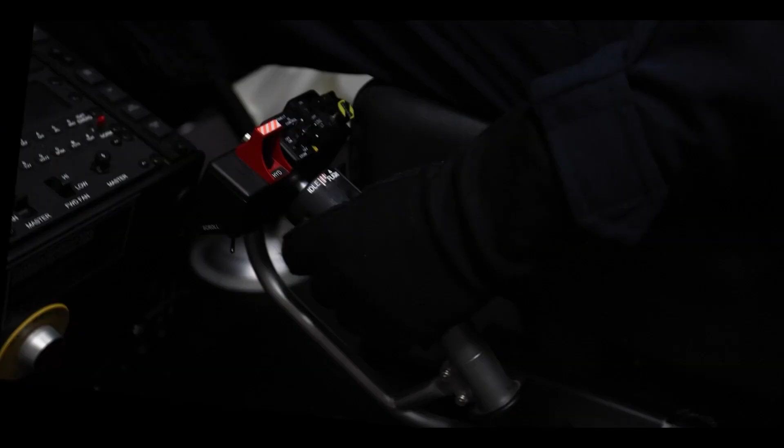You feel paralyzed, time is standing still. You vowed never to let this happen. You now have 56 seconds to live. You're way too low, and it's like the ground is reaching up to you. Panicked, you overcorrect. In no time, you're climbing fast. You now have 45 seconds to live.

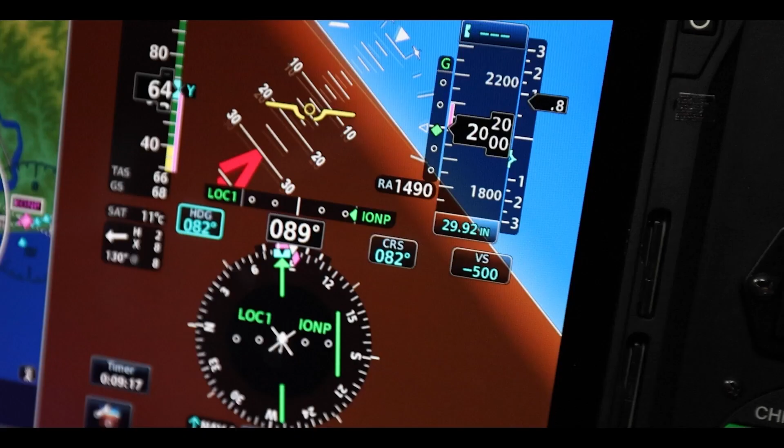Now you feel like you're turning and tumbling all at the same time and have lost faith in your instruments. Warning, terrain. You now have 30 seconds to live. Warning, terrain. This has become a nightmare roller coaster ride. Terrain. The aircraft is screaming for your attention, but a part of you is starting to let go.

Everything's darker now. You think of your family one last time. I'm sorry, can you forgive me? But they can't hear you, because you are out of time. Terrain.